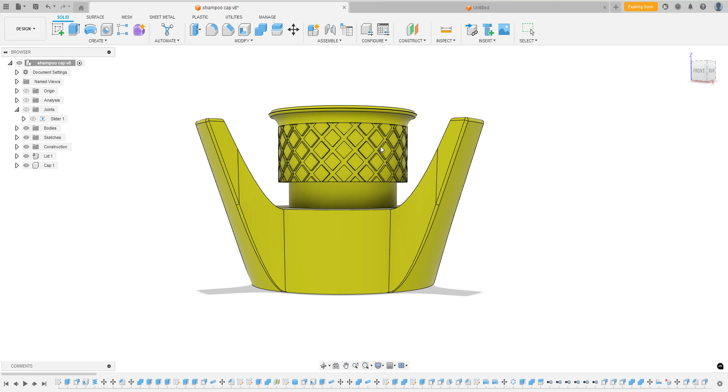Hey everyone, today I'm going to do a little tutorial for you guys on how I created this little shampoo cap. It's got two parts to it. It's got this top cap part. I'm calling the bottom section the lid, this top part the cap. You can see this moves up and down.

I've got threads that match the shampoo bottle. I am going to do that in a separate video, so this will be basically part one. I'm going to model everything but these threads, so you can see how I do this, and then when I try to figure out a good setup for showing you guys how to measure the threads on that bottle, I'll show you how I do that.

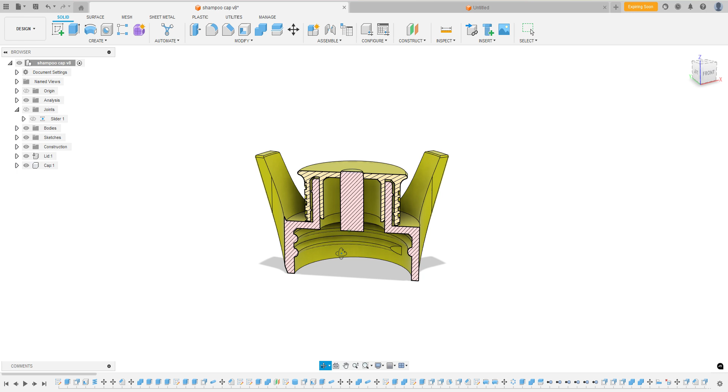But anyway, so how this cap works is the bottle is inserted in here, obviously threaded in, and then you can set it upside down so all the shampoo comes to the bottom so you don't waste any. And if we turn on our little section analysis up here in the browser, that just kind of cuts it in half so you can see what's going on internally. Here's that cap part moving up and down.

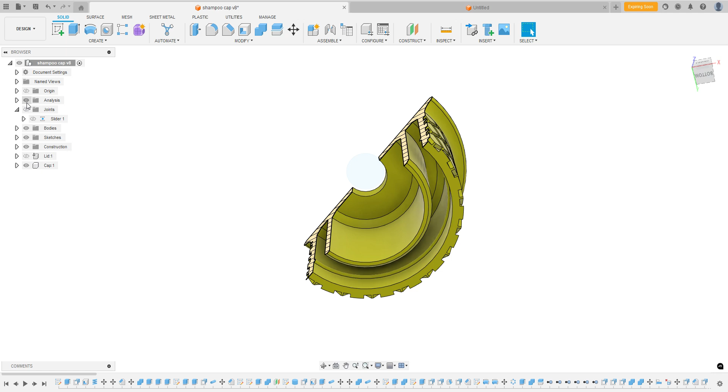And basically how this works is this cap, so let me turn off the lid. This cap has, and I'll turn off our analysis so you can see the full picture. It has kind of an inner tube and the outer tube, and turn these back on. The idea is that this is a very, very small space here, so this creates friction. So you can move this cap and it'll stop at any position.

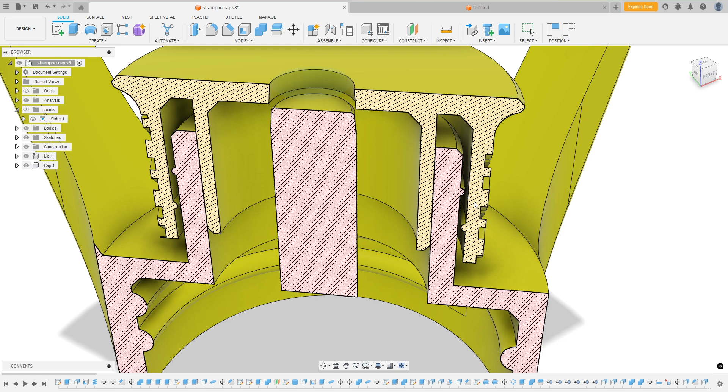And it has these little lips along the outside that catch it, so it can't move past that. And when you first assemble it, you'll have to kind of force it over past each other. There'll be kind of a snap, and then once it's in, without a lot of force, it'll pretty much stay here. And of course, this top section is where the shampoo or conditioner come out.

So I'm probably not going to give you my exact dimensions. I'm just kind of showing you what I've already designed. And the only thing I'm going to keep the same is this thread part, because later I want to show you guys how to match those threads. But everything else might be a little different than this.

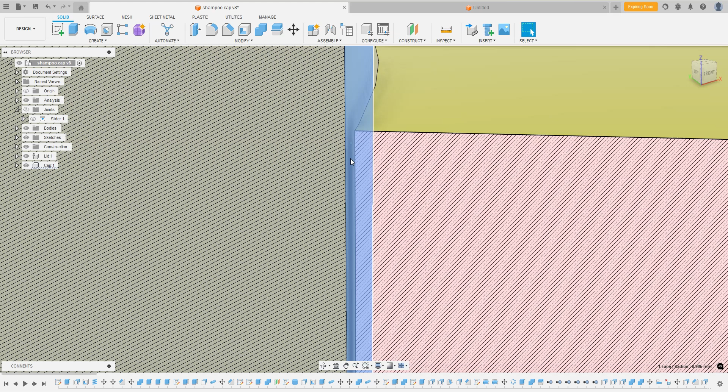And you know, I was kind of thinking if I should actually give exact dimensions, but every printer has different tolerances, and my tolerances may be different than yours. So like I have found out, let's see if I can even zoom in close enough for this. So this tolerance, if you go down here, is 0.015. I found that spacing for this friction fit on my printer to be perfect. It may be different on your printer.

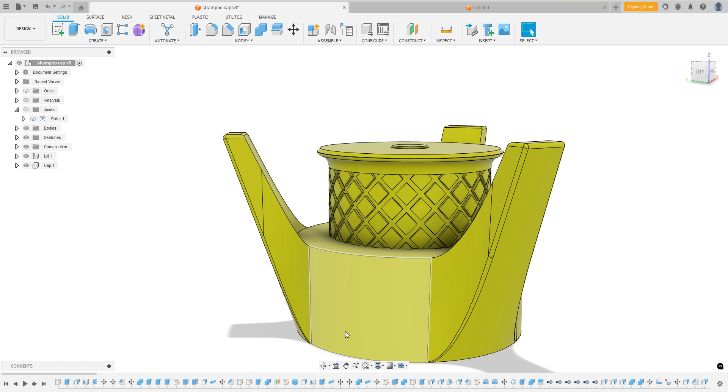So if you follow along this tutorial to make one for yourself, you can play around with all of the tolerances. So okay, the only thing I really want to measure off this is the height of this lid part. So if you click on one edge, hold shift on the keyboard and click on this bottom edge, so we have two edges selected, you can look down at this bottom section and it's 15 millimeters tall.

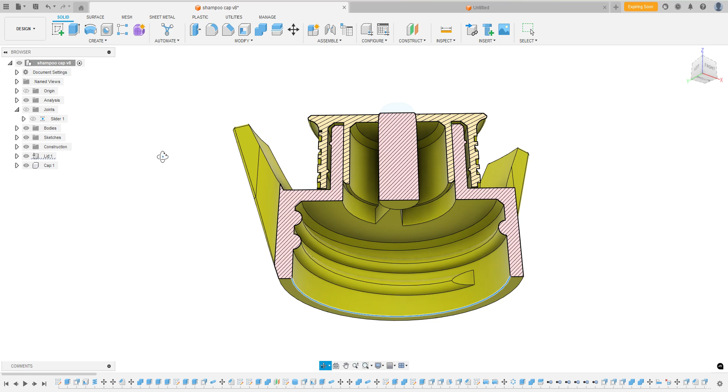Similarly, if we click on the outside edge, hold shift and click on the inside edge, we can see this is 2 millimeters thick. Let me turn on the analysis here, and I believe this is also 2 millimeters thick. The only thing we have to check is the outside diameter, so we can click on this edge, and that's giving me the radius, so let's click on the inside. It's giving me radius because it's not completing the circle, it's just choosing one little edge. I guess we can just double that.

But if we click on the inside, we have an inside diameter of 33, which means the outside diameter is 37, which 18.5 times 2 is 37. Okay, so let's get creating this. And we may come back and reference this as we're going so we can kind of see what we're making.

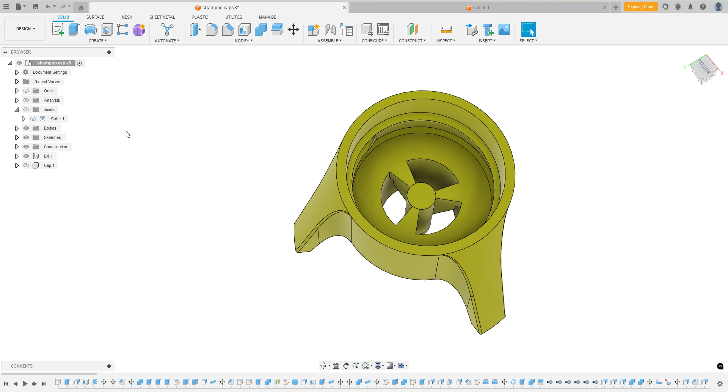And I guess one thing I didn't show very well is this inner portion. You can see how we have some wings kind of suspending this in air. And I did create a washer. One thing I should explain before going forward, 3D printing this will require supports.

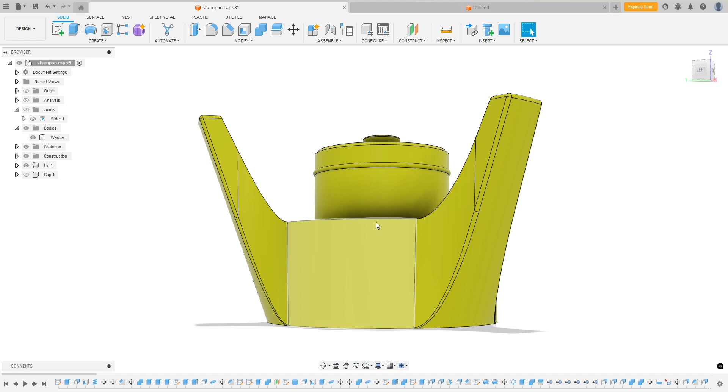It's not too big a deal if this is a super clean surface, because this little TPU washer in white here will kind of cover that surface. I do have an AMS, so my printer can multicolor print, so I will print this in either PETG or PLA and then use the opposite as support. So this should be really, really clean.

Now, one design thing you could change is you can see this surface is nice and flat. You could kind of bring this surface up at a 45-degree angle, which would make this taller. And then this inside surface would be at a 45-degree angle, which means you wouldn't need supports anymore.

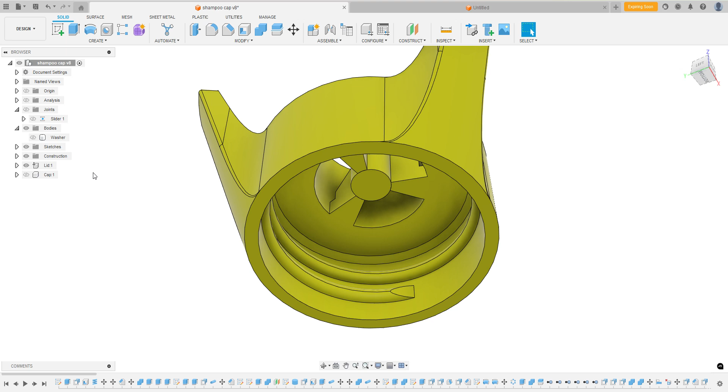However, that may get tricky because this washer kind of keeps the liquid from leaking out the lid portion here. And so that might not be a good idea. I don't know how you would do that washer without supports, but okay, anyways, let's get going. So I'm going to go start a new design.

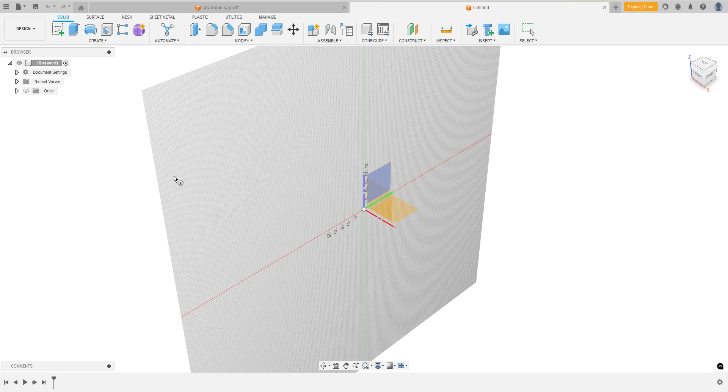The first thing we're going to do is create a cylinder, and we're going to start on that bottom lid section. And I think I said this is 37 millimeters. I'll hit enter. And then it wants the other height, which I believe was 15. Let's hit OK. I'm going to double check that. 15.

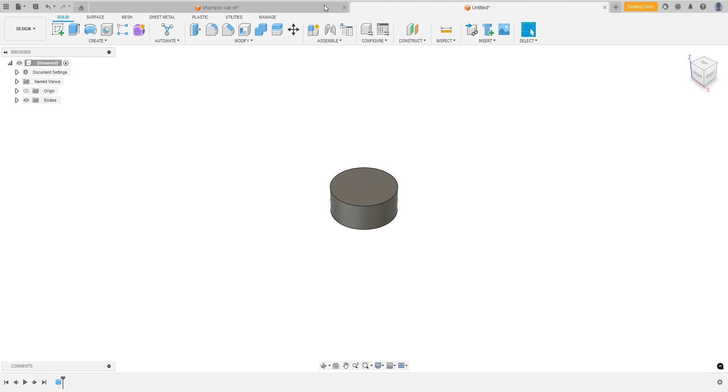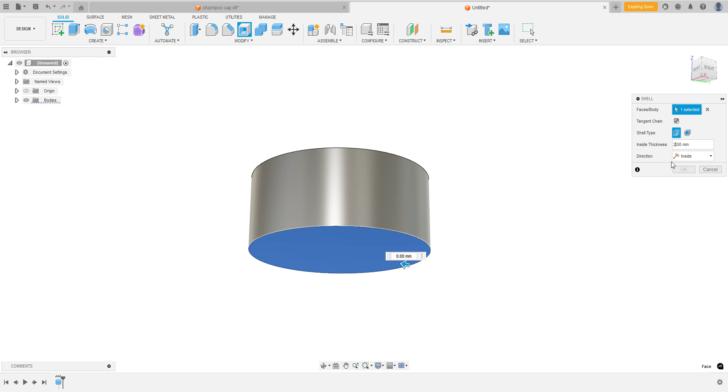Okay, so now that we have that base cap formed up with the cylinder tool, we can use the shell tool here, and we'll click on the bottom surface. We want a 2 millimeter thickness, so you can either type it in the little window that pops up here or on the window that pops up over here. So we'll just type in 2 and hit OK.

And before we go any further, we're going to set up a section analysis. I set this up on almost everything I design, unless it's super basic. But basically, go to Inspect, Section Analysis, and a little window is going to pop up, asking you what plane. And let's work off that front plane. It opened up that view from the back. So if you go on this window, you can flip it and hit OK.

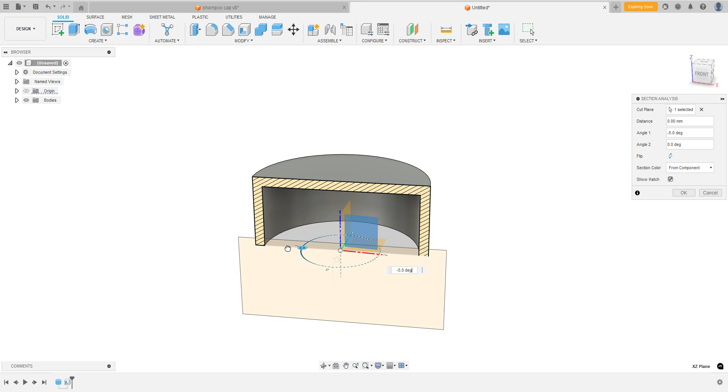I suggest you play around with the section analysis tool. Whenever you click on one of these tools or modifiers up here, a little window pops up that gives you all the different options. I'm just choosing the basic section analysis, but you can rotate this in any position you want in either direction and get a really cool analysis of what's going on. You can set up multiple analyses. You can move this front, back, right? So we just need the basic one, so I'm just going to leave it there.

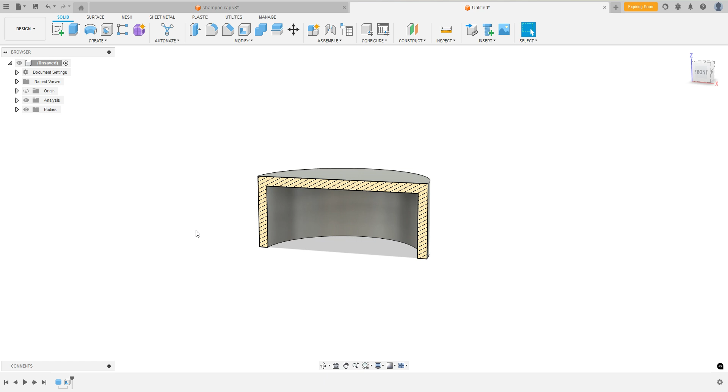But the reason I do that is because I like seeing what's going on, right? So you can see after we created it, it shows up in your browser over here, and you can toggle that on and off. If you have more than one set up, you click on this little arrow to go down, and you'll see all of them listed here, so you can turn that one off. And this isn't getting rid of the model. It's just kind of showing you a sneak peek. It's hiding half of that model, so we can see what's going on. So let's turn that analysis off.

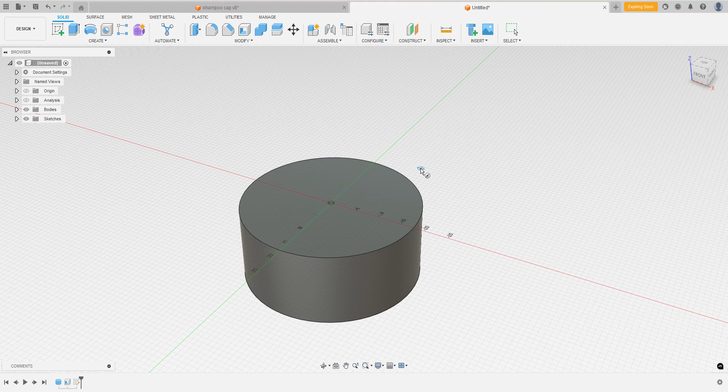So we've got that basic shape there, and now we need to do this top section. So let's create another sketch. Oh, I'm sorry, let's not create a sketch. So I'm going to hit escape. We're going to create another cylinder. So instead of selecting one of the planes, I want to put this next cylinder on top of this one. So I can just click on the surface of that cylinder, and you can see little crosshairs come up. I'm going to put that on the origin. Click once, and then let go of the click and just move your mouse out.

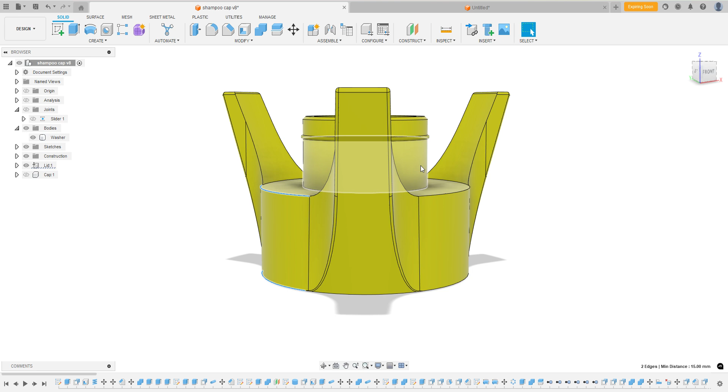So I'm just making this up at this point. Let's go 12. Well, let's go 14. And hit enter. And that seems really, really small compared to my other ones. We may go jump off some measurements over here. So what do we do for this one? 22. So that looks way better. So let's go to create cylinder, click on the center, type in 22, hit OK.

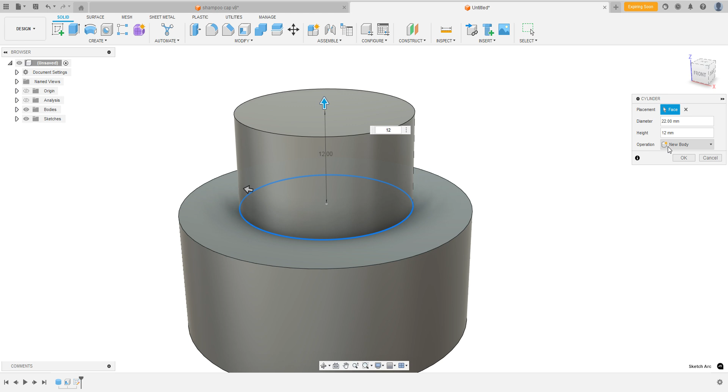And I think where I got that 12 is I made this 12 tall. And we can join this. Whenever you are creating a solid body and it touches another solid body, because remember we made the cylinder on top of this one, it's always going to have join selected, and that's going to join these two as one body. You could create a new body to keep them separate. There's no reason to in this case, but just keep that in mind.

Okay, and if we go to the browser over here, you can see now we still just have one body. Let's see, I probably should have joined these together before doing that shell command, because now I've got this weird situation here, and that's not that big a deal. I think we can probably just hit shell again and see if it shells it out. So it doesn't. So what we can do is, if we go back on our timeline here, I'm just going to delete that shell command, and you can see it's gone now.

And so now if I go to shell again, I can click on more than one surface. So every time you click a modifier, like I said, this window pops up and it kind of gives you directions on how to use it. So what it wants you to do first is usually highlighted in blue. So it's wanting me to select the faces or body. So if I click on a face, you can see I have one selected, and that will be the opening of the shell.

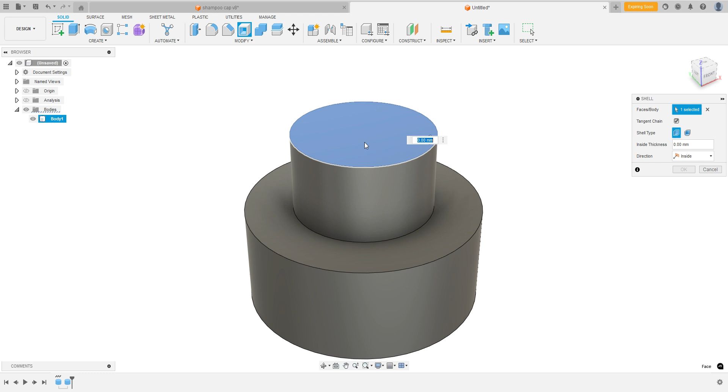But if I click on two faces, so now I have the bottom and the top selected. You can see it shows I have two selected, and if you made a mistake, you can hit this X and undo it. So let's click the bottom and the top, and you don't have to worry about tangent chain in this case. I'll explain that in a different video when it comes up. Shell type, this just makes the inside edges a little different, and then the thickness of the wall, so we'll go 2 millimeters, and I'll hit OK. And now you can see we've got that opening. So let's go to analysis, and there we are.

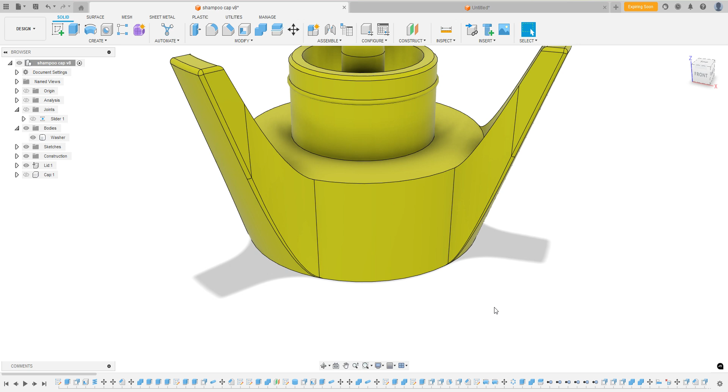And keep in mind, as I'm making these videos, I do not rehearse these. These are unscripted, so you're kind of designing with me. Even though I have designed this before, I may change how I do things in this other one. So I may fumble around a little bit, which kind of makes the format of these videos a little longer. But I think there's something to be said about designing along with someone instead of them just showing you what to do, right? Because I may make mistakes, and then I can show you how I would go back and fix them or change them. So, okay, turn analysis off.

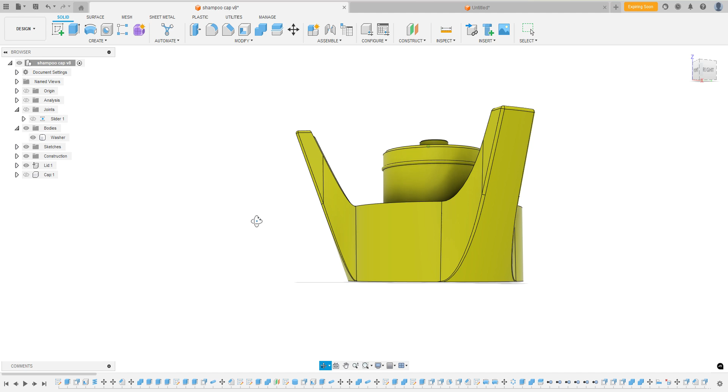So we have the basic shape. I'm not going to do these arms yet, just because I don't want them getting in the way of designing my cap, right? I don't want these little legs or arms, whatever, just constantly in the way of me working around. So we'll save these for last. And so we'll do the cap next.

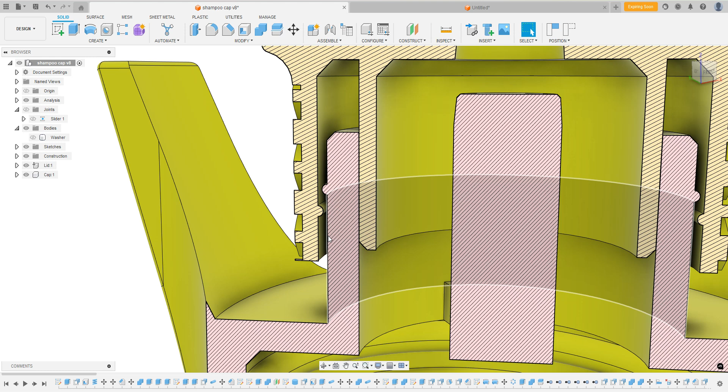And the one thing I'm going to do differently than what I did in this model, let's turn that washer off so that's not confusing, is other than this allowance right here between the cap and the lid section, I'm not going to create any tolerances, and I'm going to add those tolerances later. I'm going to keep those tolerances at the end of the design, because that's what you're going to end up changing when you print this, and you might find that something's too tight or too loose, and then you can go back and change those tolerances.

Here's my timeline on this. You can see I can scroll all the way to the end and all the way to the beginning. Here I'm way at the beginning. If I start doing my tolerances way in the beginning, and then I do all of this work to get to the end, and now all of a sudden I have to change those tolerances, it starts just getting a little messy. So just keep that in mind. And you might work differently, but that's how I'm going to do it. So let's make the cap. So we've got, if I select on this ring, this was 12 millimeters.

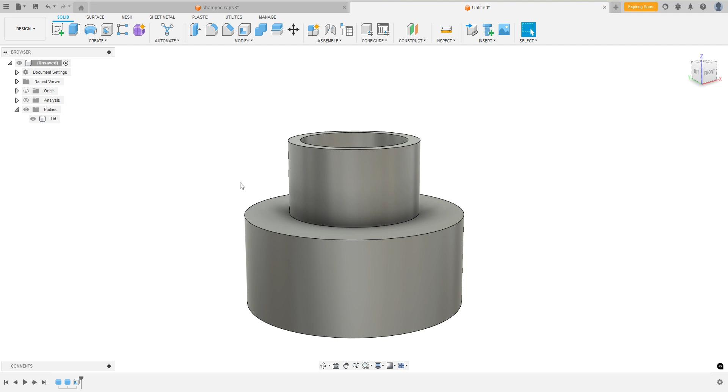Okay, so the cap section, remember this is going to be the lid. So let me just label that now so we don't get confused. The cap section is also going to have 2 millimeter thick walls. And you know, right there, actually, I might change my mind. This cap, when you first put it on, there has to be a little give here, because it has to snap around these pipes. So it has to kind of be able to deform a little bit.

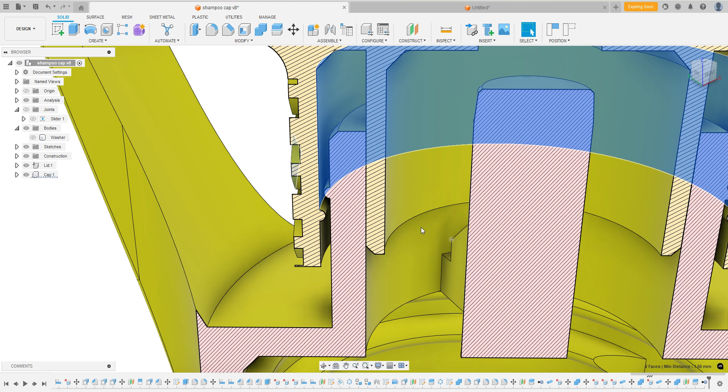So you can see, let's see if this is 2 millimeters thick. Actually, I have this cap at 1.5 millimeters thick, and this at 2 millimeters thick. And I think the reason I did that is so this cap section can kind of deform a little. So let's do the 1.5. And again, this is stuff you're gonna figure out as you design stuff. I probably on my first iteration of this design made this 2 millimeters thick, and then realized it was too thick and changed it to 1.5, which gave me a little bit more play.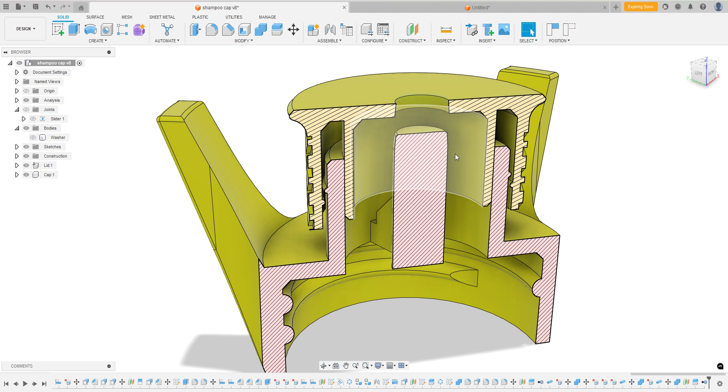So let's do another cylinder here, and let's see if I can get my math right on the fly here. So there's a diameter of 22 millimeters, and I want 1.5 millimeters this way and 1.5 millimeters this way. But then I also have to add that tolerance. So I'm actually just going to make it 2 millimeters. So I'm going to have to double that to 4 millimeters. So we need 26 millimeter diameter. I hope that made sense, and I hope I did that right.

So let's get on cylinder here. We're going to click on that surface because that's where we want it to start. So I click that surface. I see my crosshairs. I'm going to go to origin, drag out. There's my 22. So we're going to go, what did I just say? 26. Hit the mouse, and now it wants us to do the height.

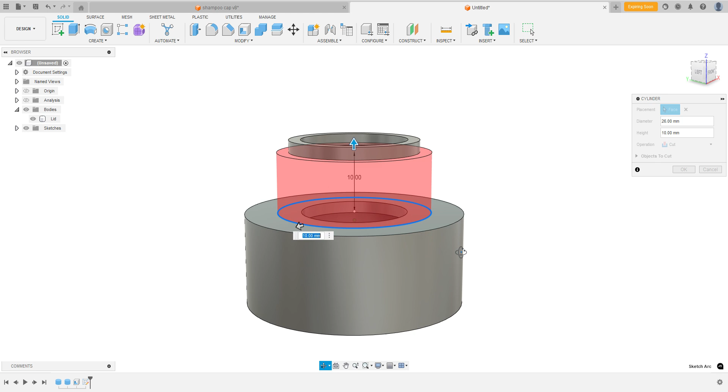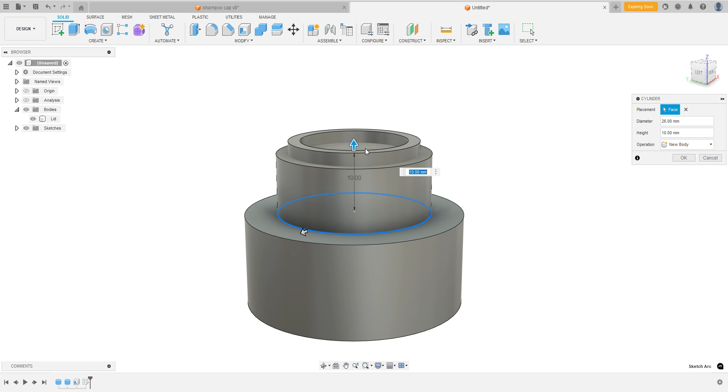Now you can see this is in red because I'm kind of intersecting an existing body, and we're not going to want to do that. We're going to want to new body this. We don't want to join, right? Because this is going to be a separate part. So pay attention to the little window that pops up. And right now it's at 10 millimeters tall, but the lid was 12 millimeters tall, and we need some space there for the thickness of that. So let's go 14 millimeters, and actually, you know what? Let's go 15. I'm going to hit OK, and I'll show you why here in a second.

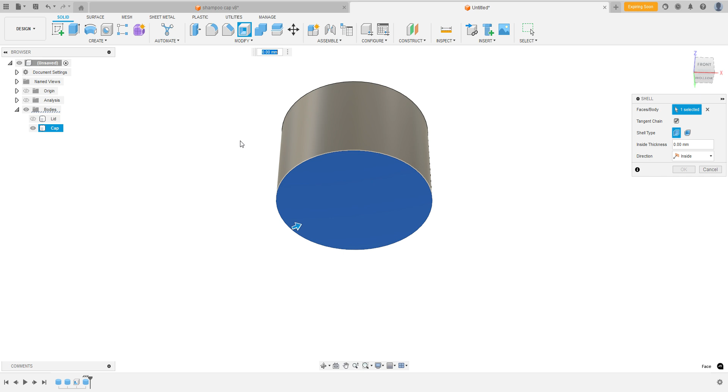So let's just name this cap, and let's turn on the section analysis. You can see it is a solid body, so we can get rid of the lid section. We'll click on just the bottom, and we'll hit shell, and we'll do 1.5. You can type it in and hit OK. And let's see how we did with analysis. Let's turn on our lid.

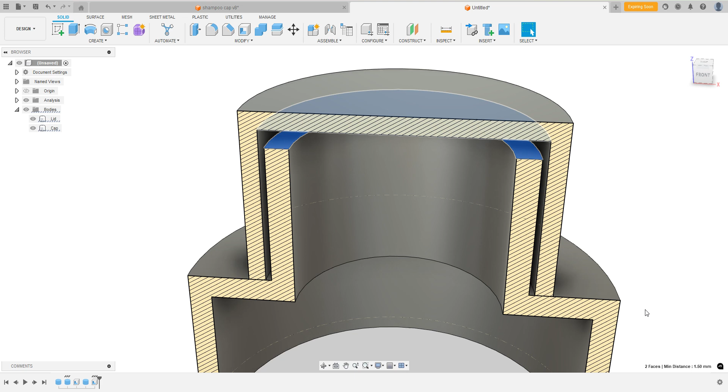So there you can see we've got a nice spacing here. Let's see what spacing we have here. Let's click on this edge, and we have 0.5 millimeters here. So that seems okay. And what's our spacing here? Remember, you click on a surface, hold shift on the keyboard, click on another surface, and we have 1.5 millimeters here. And that's probably more than we need.

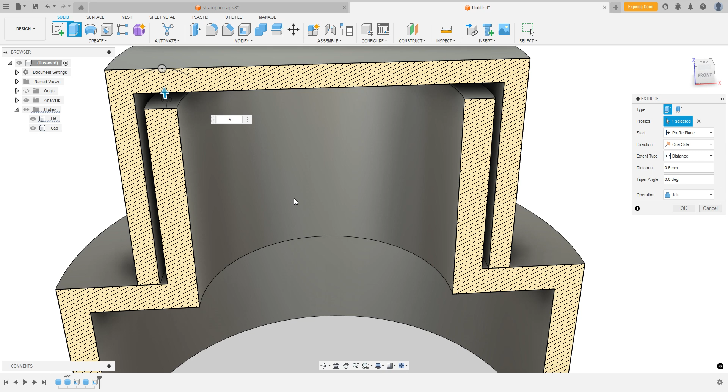And you know what? This is how you would change that. It's much easier to change this right here than this whole thickness, since we've got a 1.5 millimeter. Let's keep that the same. So we can click on this, hit E for extrude, and let's go up 0.5, hit enter. And now we have a nice 1 millimeter gap here.

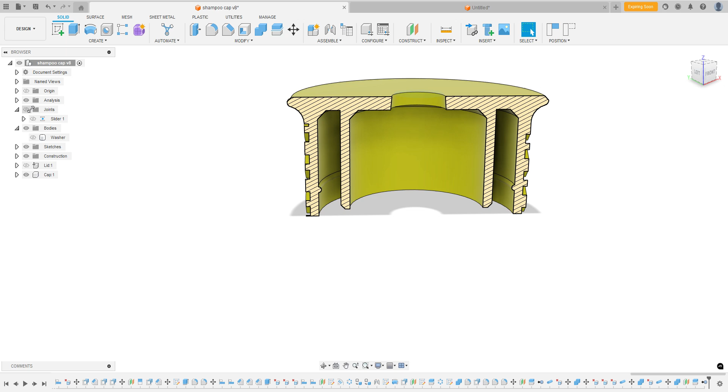Okay, so let's turn off the lid section and let's worry about the cap. So we've got that of the cap. Now if you go back to our existing model, we'll turn the lid off, turn our analysis off. Now we need to create this inner ring. And one other thing to keep in mind, remember I said I was going to change those tolerances at the end. One other thing I'm going to wait for till the end is all of these chamfers and fillets.

You can see I have all these rounded edges here. I'm also going to save that for the end, because just like for my tolerances, if I want to come back and change dimensions here, these chamfers just kind of complicate things. Now, if you know what you're doing, it doesn't complicate it too much, but you might as well just work with a very clean design and then add the details later, right?

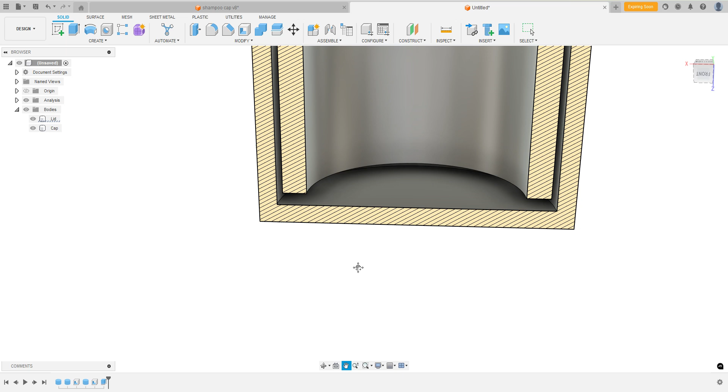So let's make that inner ring. So we've got our lid, and let's turn analysis on. This is why it's so important for the analysis. So remember, this inner tube or inner pipe, I'm not sure what you'd call it, is the same diameter of the inner pipe of the cap. So if we click on that rim, it is 18 millimeters. So we need an 18 millimeter tube here.

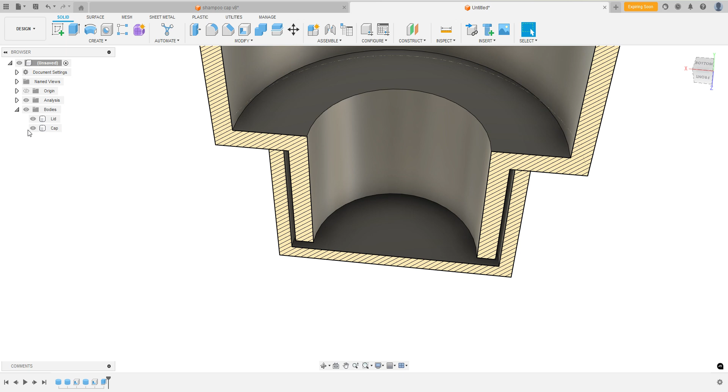So you could do it with the cylinder command, but I'm going to do it a little different here. Actually, I'm not going to click on that surface yet. I'm going to draw a sketch. So remember, this is 18 millimeters. So let's turn off the lid, and we can just turn analysis off for now. So let's create a sketch right up here. And we don't want to click on the plane. I want to draw it right on the surface of this cap where I'm going to draw that tube.

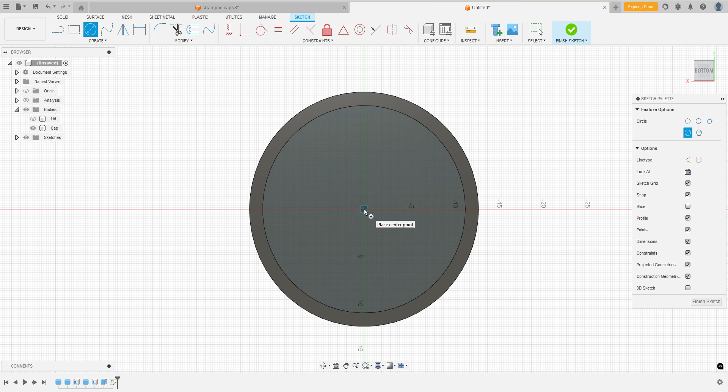So we'll click there. I can hit C on the keyboard, C for circle, and move to the origin. It kind of snaps to it. Click the mouse, and I'm going to hit 18 millimeters. You could draw another circle here, because we want a thickness of this pipe, right? But there is an offset tool that you can click on your line you just made, and it's 1.5 millimeter thickness.

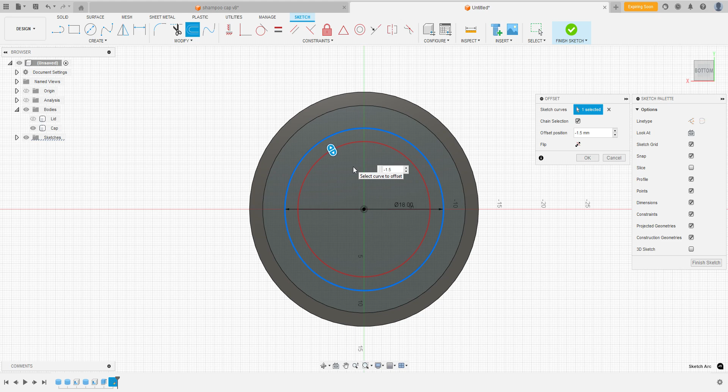But we want to go in the opposite direction. So let's do negative 1.5, and then we can hit enter. And there is our sketch that we have drawn on the surface of the inside of this cap. So we can finish sketch. Let's turn analysis back on, and let's turn lid back on. And now, I tell you what, this will be a good learning experience here. We don't want to turn this lid back on. I'm going to show you why.

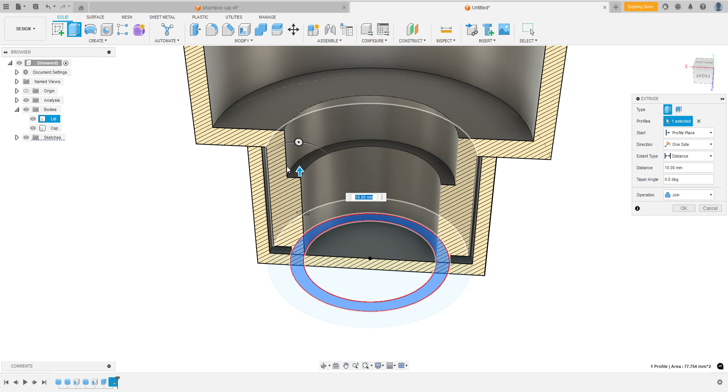When I hit E for extrude and click on this surface and I pull this up, see what it's doing? It's joining with this. And you could go and hit new body, but now it's not connected to either body that we have. It's just its own new body, and we'd have to go back and combine it and do a lot of extra work. So let's hit cancel. What you want to do is make sure anything that you don't want it to join to is turned off. So we can turn that lid off, or when I say turn off, I mean hide, right, with this little eyeball.

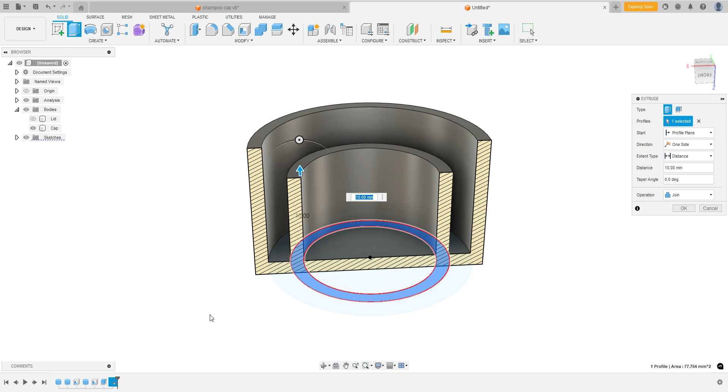It's still there. So now if I click that surface and hit E for extrude and come up, let's just go 10 millimeters. We're just kind of playing around. Now you can see it's on join, and it joined with the cap. So I can turn that sketch off now, and now it's one body, right? And so now you can turn the lid back on, and there is our nice friction fit. And there is no space there, right? So if you're 3D printing that, that won't work. You do need some space there, but we're going to do that later. So there is our basic structure so far.

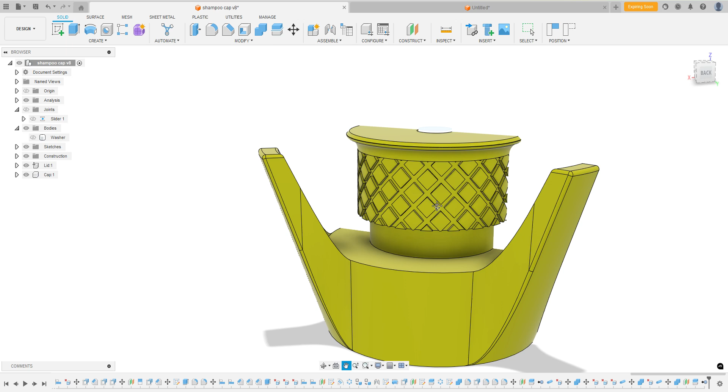If we go back to our other one, you can see that's a lot more complicated, but we've got the basics of it down, right? And one thing I'm not going to show in this is this little diamond pattern. If you really want to see this, maybe I'll make a little shorts video on it. But I have found that once I 3D printed this out, I didn't really like how it looked. I thought I would need it for some finger gripping, but this little lip here is plenty. You don't need any of this texture here for your finger grip. And if you look at other shampoo and conditioner bottles, they don't have any weird patterns on theirs, and it's always smooth.

I think the reason for that is it's going to be in a moist, damp bathroom all the time, and all these little spaces are just more spots for mold and grime to get into. So I'm going to leave that out, and I think you should too if you're making this yourself.

So I think the next thing we should do, since we have the structure of that lid pretty much done—obviously there's a few more things like this little lip here, but we can do that later—let's do that inner spindle.

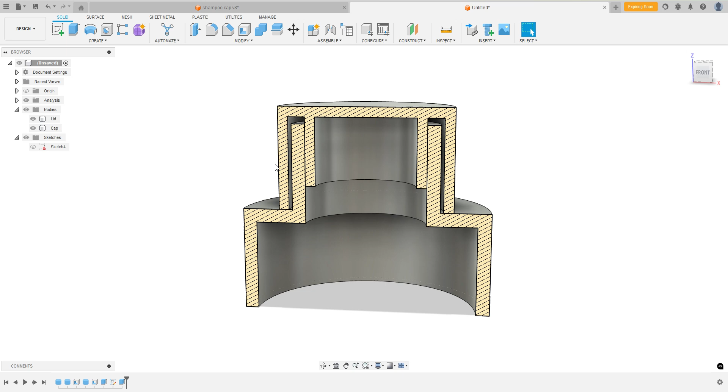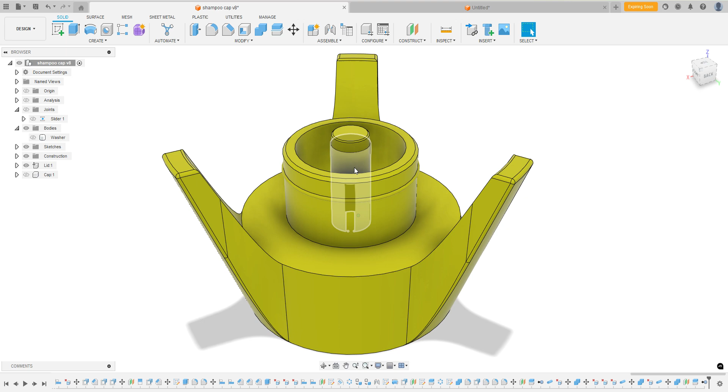So let's go back to this. Sorry, I'm switching back and forth a lot. If I get rid of the cap, you can see we have this floating spindle here, and three little arms or gussets, whatever you'd call them, suspending it in the middle. You need that because that's what allows the shampoo to come through. This spindle sticks up, and if I turn the cap on, it gets lodged right in that hole to stop it from coming out until you pull it up.

So let's create that. We can turn the cap off because we're just going to work with the lid section here, and we want to create another cylinder right in the middle, floating in air.

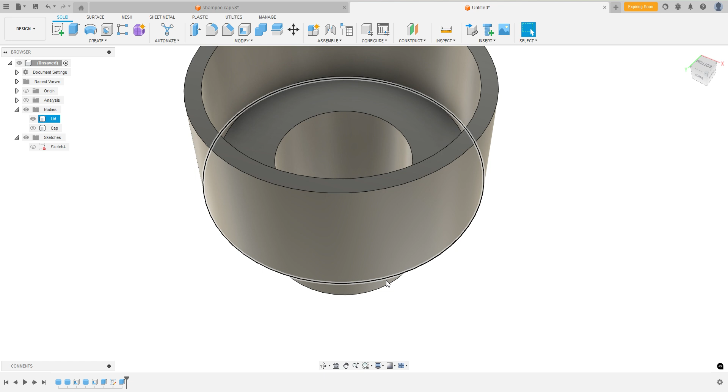So you might ask, how would you do that? There's a few ways. You could draw a sketch—we know it's going to be in line with this surface right here, so you could draw a sketch and then draw a circle. But we can just use the cylinder command, or the cylinder modifier.

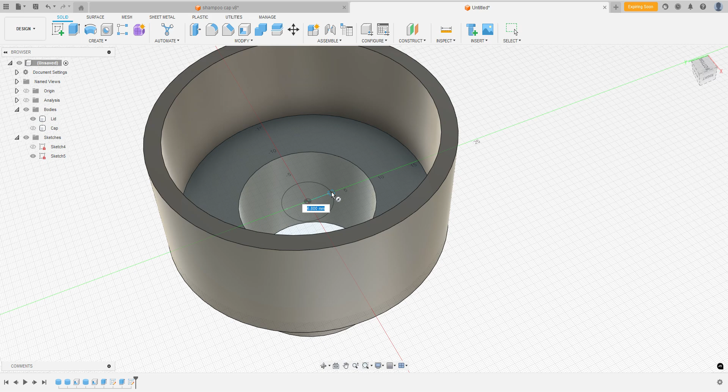So if we go to cylinder, we click on this surface, which starts it on that plane, and we click right in the center and drag it out. Let's just keep it at 6. That might be too big—I guess that's about a quarter inch, so that's probably okay.

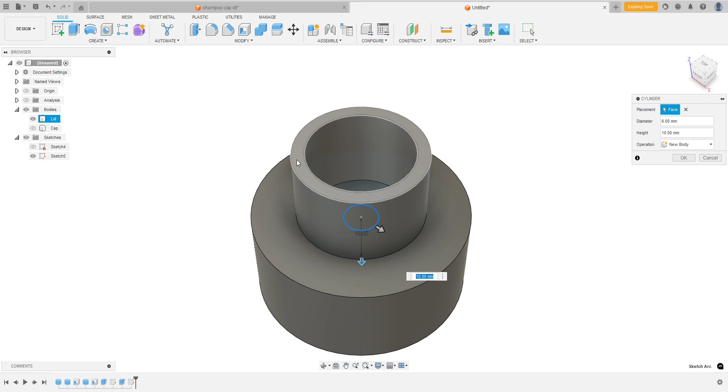You can see this arrow is pointing in this direction, and it's a positive number, but we want it to go the other way, up here. We could type in negative 12 since we know this is 12 millimeters. But the cool thing about the extrude command—sorry, we're in the cylinder command—is you can just click on the surface where you want it to stop, and see how it automatically lines up with that.

When you use the extrude modifier, you can do the same thing. And actually it wasn't 12—look, negative 14.5. I'm not sure, I thought we made this 12. Doesn't matter, it's even here.

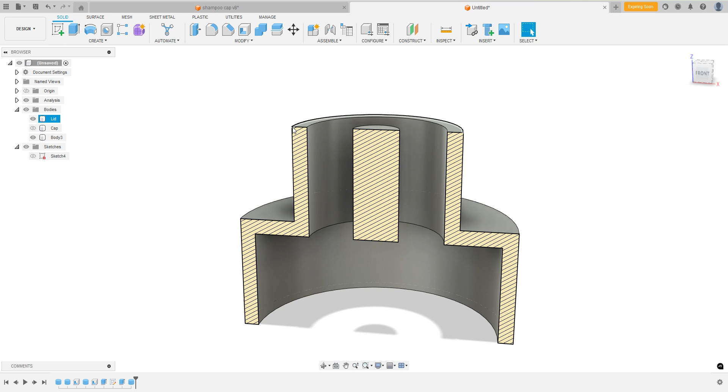If we do analysis, there we go—oh, it's 14.5 because we forgot to add this section. Is that 2 millimeters? This is... oh, we added that 0.5 millimeters here. That's why I was confused it was 14.5, but it's 2 plus 12.5. Remember, we added 0.5 millimeters here. Okay, let's turn analysis off so you can just see what's going on.

There's our spindle. Now let's create those little arms. There are probably tons of ways of doing this—I'm going to do what I usually do, or how I know best. There's tons and tons of tools in Fusion 360, but you have to use the tools that you know.

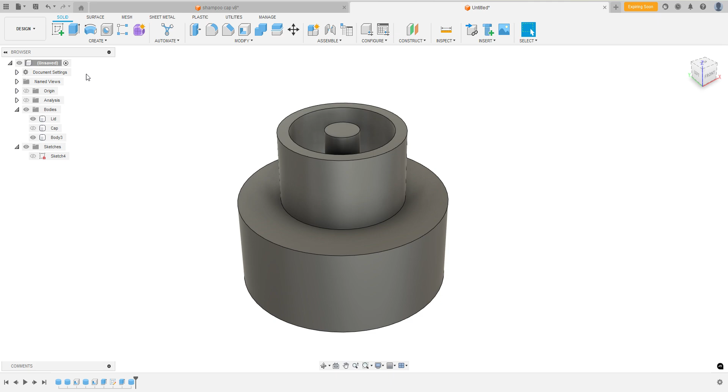So I'm going to create this from a sketch. Let's hit sketch, and I'm going to work from the front—I'll rotate this so the front is facing forward, and we're going to draw that sketch right in the center. Remember, that plane I just drew the sketch on is right along this red line, so we're drawing something right through the center of this body.

So if I go to the front view again, I want to outline what the inside of this body looks like. There's a really cool way of doing that in sketch.

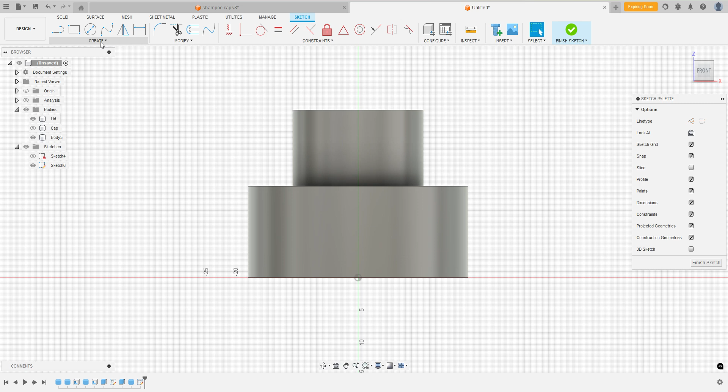You're going to go to Create, Project/Include, and Intersect. Basically what it's going to do is take the plane you're drawing the sketch on and intersect it with the body, giving you that sketch.

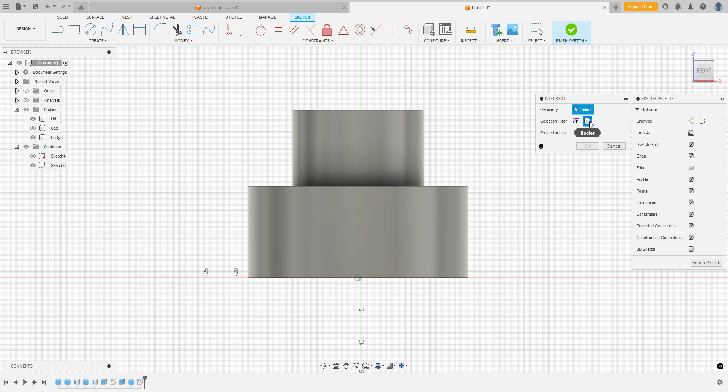Let me just show you, it'll be way easier to see. I'm going to choose body because I want to select bodies, and it's asking me to select them. So I'll click that. And I don't want this to be a projection link, I want it to be an actual sketch.

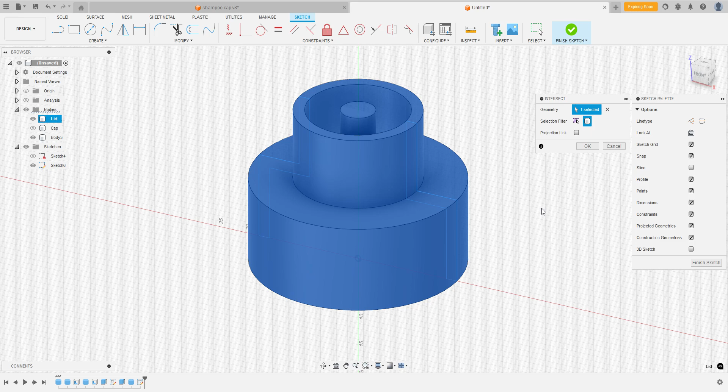I'm going to leave that off. How I think this works is if you have this checked, you still see the lines, but it's not actually an editable sketch, just a projection. If we turn this off, it actually becomes part of the sketch. Let's hit OK, and now look, it took that plane and cut this.

Now look what I forgot, I actually forgot to select this body, because remember, this isn't part of the lid, so it only drew the slice of the lid. Let's just do it again. We're going to get Create, Project Include, Intersect, click this, and hit OK. Now you can see it selected that as well.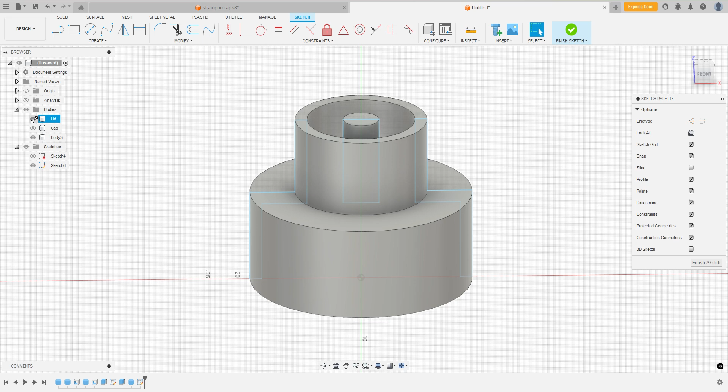So now we can hide that body, hide the lid and the little spindle here, and there you go, we have our slice. Now let's make those arms.

I'm going to hit L on the keyboard for line, or you could click up here. I'll create a line here, drag it over, and create a line somewhere in here. I want to show you a cool trick: if you want to draw a line in line with this, go to the point and drag over without clicking anything, and it lines it up for you. Now if I click and move my mouse, it's right in line with that.

I want this to be a 45-degree angle, though it doesn't have to be, you could pick whatever angle you want. Maybe up higher would give it more strength, but to keep things clean, I want 45. You can type in two little windows here, the one below my cursor for length, and the one off to the side for angle. If you hit Tab, you can switch between those. I'm going to hit Tab to the angle and type in 45 degrees.

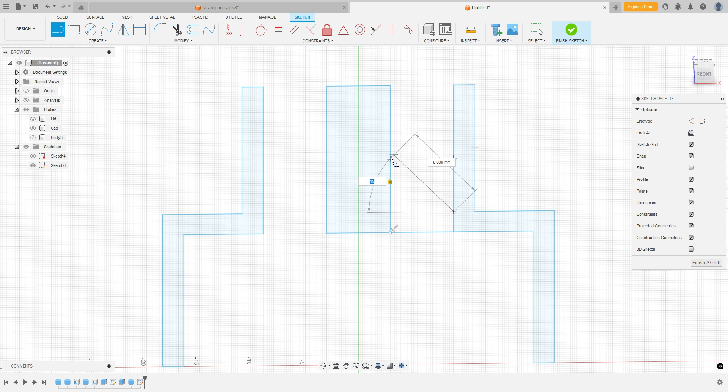No matter where I go, it's locked at 45. I think I went back to center and that got me out of the lock, so let's hit Tab, 45 degrees, bring it over here, and it'll snap to that line, then click the button.

To make this a little stronger, I'm going to just pick a spot, well, might as well pick this line since it doesn't mean anything, and drag it over. Now if we hit the trim tool, we don't need this little line here.

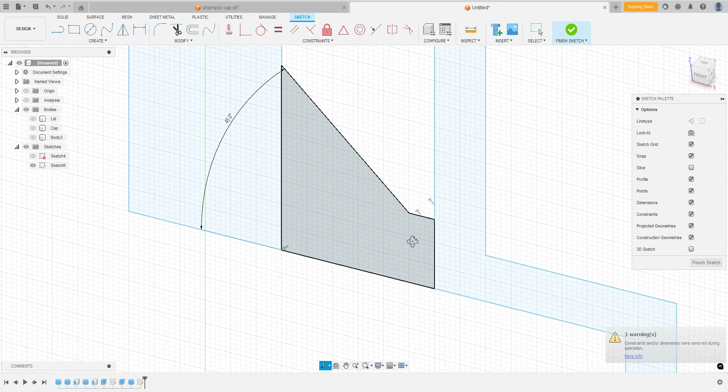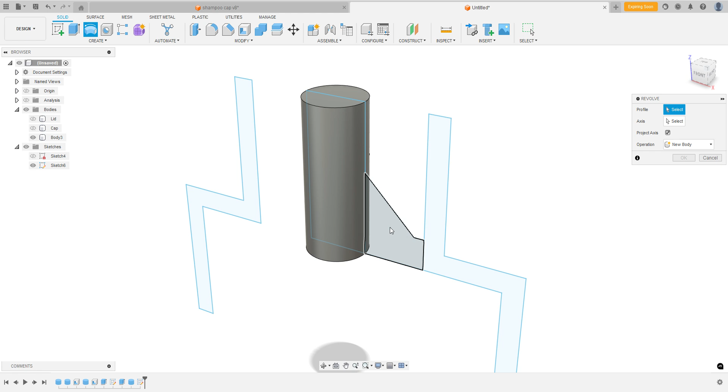Now I have my profile of that little arm. Let's finish sketch and turn the spindle back on. Now we want to create this profile into a solid body, so I've got a tool for that called Revolve. If you click Revolve, it wants us to select the profile, and we know this is the one we want. Then we select the axis.

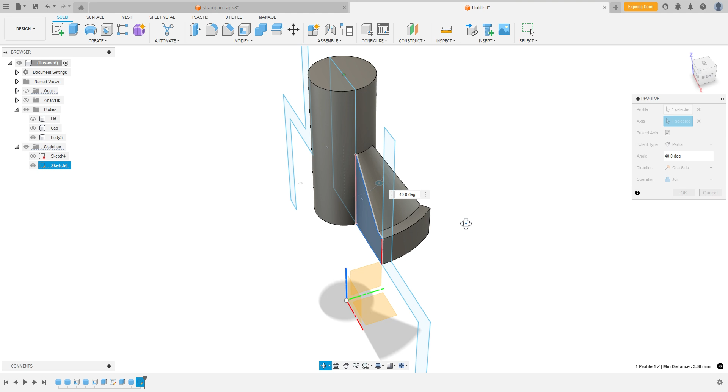I'm going to click on the Z axis, and you can see it rotated it 360 degrees. Well, we don't want that. We want maybe 30 degrees. How does that look? Let's go up to 40 degrees. We've got plenty of space in here. This is 3D printing, so you want to beef it up a little bit. And that looks pretty good.

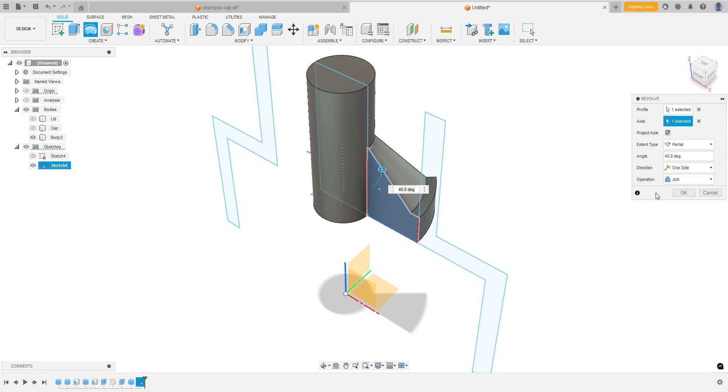So let's hit OK. Actually, before I hit OK, always remember what we're doing here: join. So this new body we just created, we're going to join to this body because it's visible. If we had turned this off, you'd see it switch to new body because there's nothing to join it to. With this on, it switches to join. You can always go down to new body, but just pay attention to that so you don't screw yourself up. Okay, hit OK.

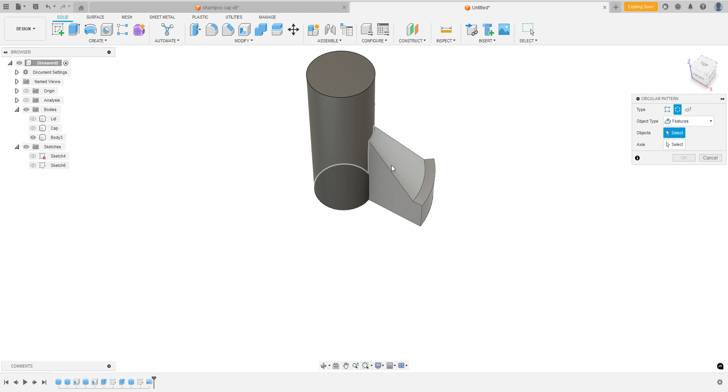I'm going to hide this sketch. And now we want 3 of these. So we're going to go to Create, Pattern, Circular Pattern, and it wants us to choose a body, but we don't want to choose a body. It would work in this case because we'd just rotate around the cylinder, but that's not good practice. We want to select a feature, and the feature was this revolve, and it recognizes this as a revolve. So you could just click there, or you could click down in your history.

And again, the axis it wants. If you have a complicated project and can't see this Z axis or one of these axes, you can actually just click on the circle you want to revolve it around, and that'll act as the axis. And there we go. Over here it says 3, which is already selected. So let's hit OK. And there's our little arm.

So let's turn back our lid here and let's turn on analysis. There you can see—let's turn off analysis, I guess we don't really need that. And there is our center portion.

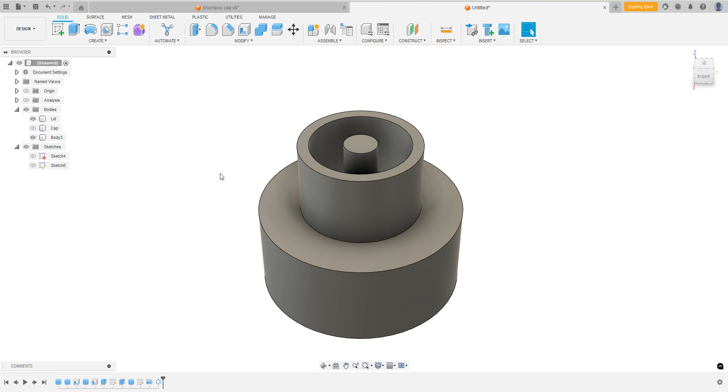So let's just join these 2 bodies, right? We have this little intersection, and then we have the lid. There's a modifier up here called combine.

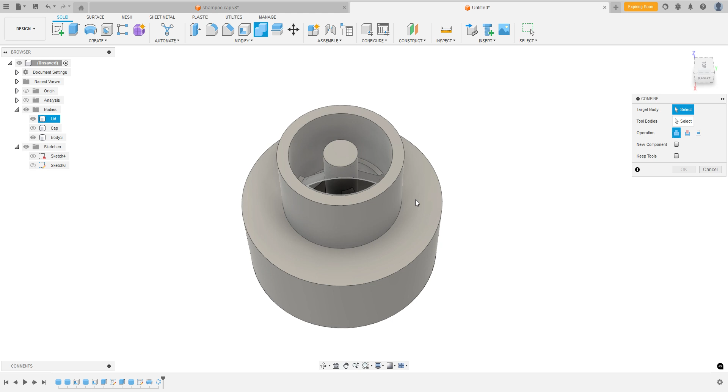So you click on that, a little window pops up, and it's wanting the target body first, then the tool body. The target body is what you're doing something to. I want to add this to this, right? So the target body is the one we click and it says 1 selected. Now it wants the tool body, which is what we are adding to it. You can see we have them selected. There are a few options here: join, cut, or intersect. We want to join, so we can hit OK.

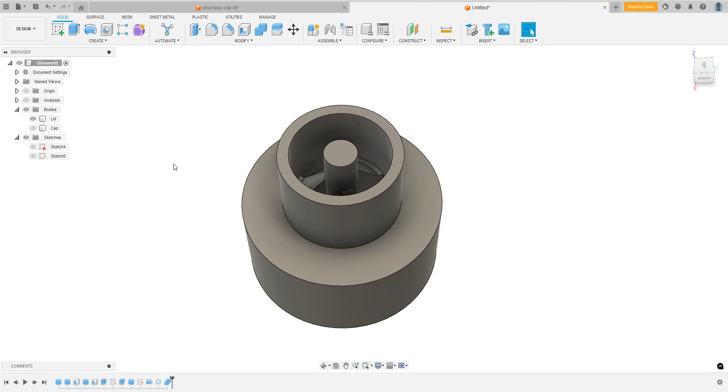And if you look now, that other body disappeared and it's now 1 body. So let's do a little quick pan around, and let's go to the cap and turn on analysis.

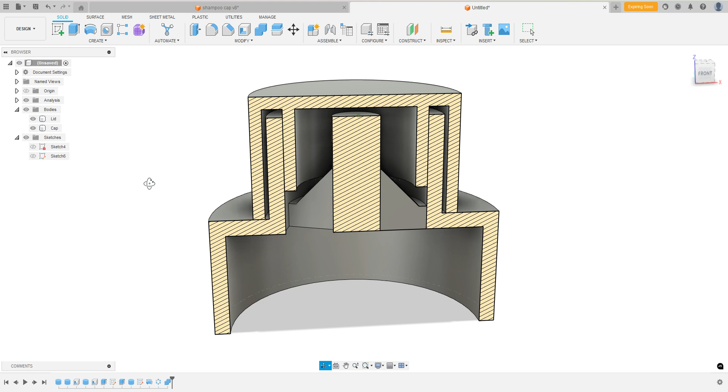And I'm no expert at these joints, but the reason I can create this sliding motion is I created this joint right here, a slider joint. I can show you how I did that. I'm not great at it, so maybe I'll have to do a few practice runs before showing you, but I'll go into that as well.